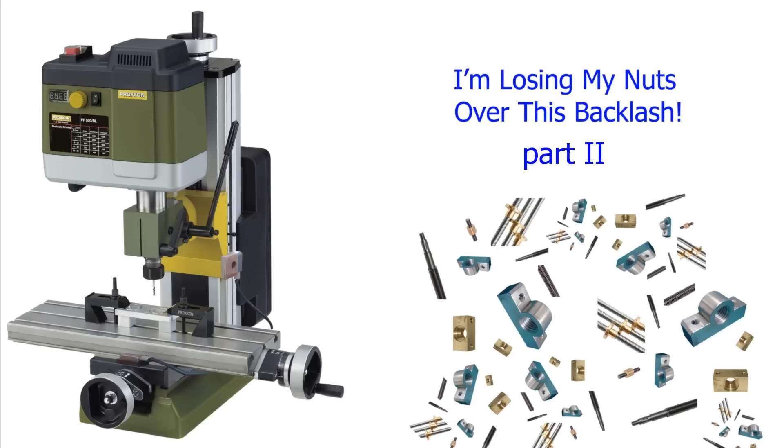In the previous video, I replaced the Z-axis of my Proxxon milling machine and reduced the backlash, the combined play in the lead screw, the nut and the bearing, from 320 to about 55 microns. With some careful adjustment of the nuts later on, I'll probably be able to shave off a few hundredths of a millimeter more. In this final video, I'll be tackling the Y and X axes.

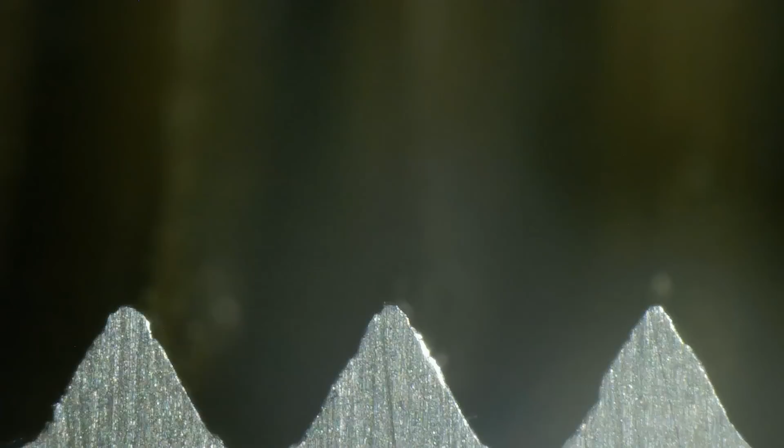To get a clearer picture of what I consider excessive wear, I want to determine whether it lies in the nut, the lead screw, or both. As we saw last time, play in the bearing also contributes a little. I'll be examining the sawn through nut and the shaft more closely under my microscope.

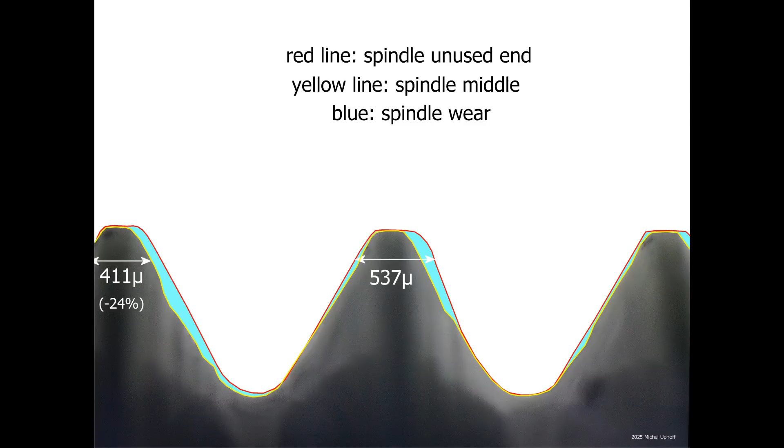It's clearly not just the nut, the screw itself is quite badly worn. That shouldn't really happen. In principle, the cheaper nut ought to take the wear rather than the lead screw. That is indeed the case here, but with 200 millimeters of screw engaging with a 16 millimeter nut, this degree of wear on the screw is really not normal in my view. I suspect the steel is of inferior quality. I'll return to that point briefly at the end of the video.

And so, the combined wear of the lead screw and the nut results in an irritating play of more than half a millimeter, enough to make even the most patient machinist groan.

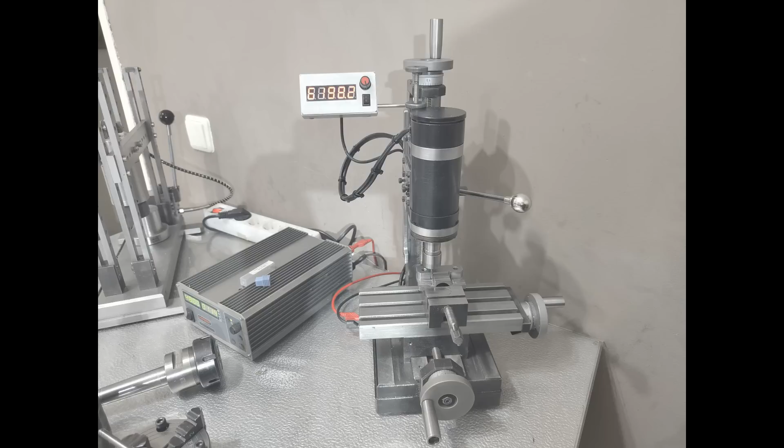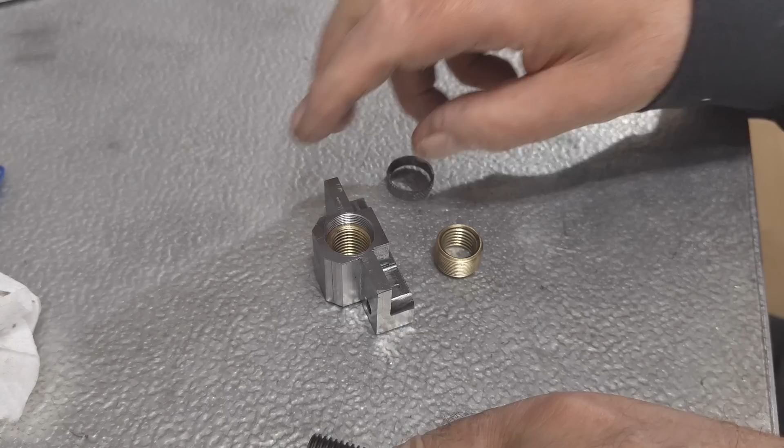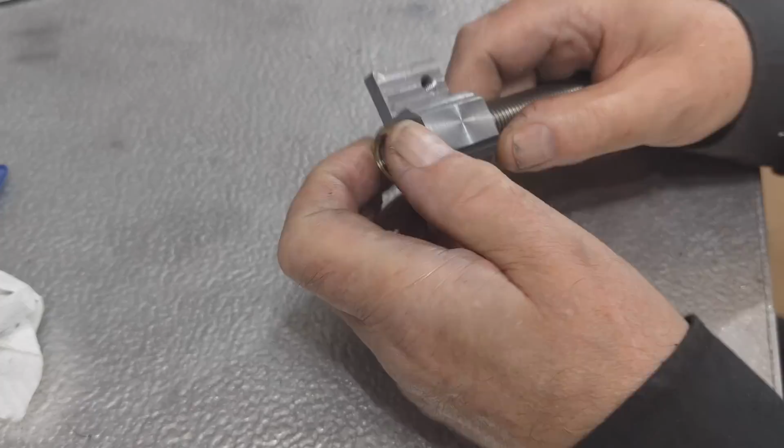The internal trapezoidal pitch of the nuts is 2 millimeters, while the external pitch is 1 millimeter. The long nut is secured with a dab of metal adhesive. By rotating the short nut, the play between nuts and lead screw can be eliminated. I lock the short nut in the desired position with a collar.

The Y-axis lead screw and nut are ready. I first fit the lead screw into the bearing block and set the preload by tightening the handle nut. Then I lock the whole assembly in place with a set screw. It is the same design I used when building my micromill, and it has served me very well so far.

Now, here's the amusing bit. In the original German version, a single rather wobbly bearing would have cost me more than all 6 thrust bearings and 3 ball bearings from China put together. Superior performance at a fraction of the price, which makes you wonder if the only thing truly precision engineered in Germany was the invoice.

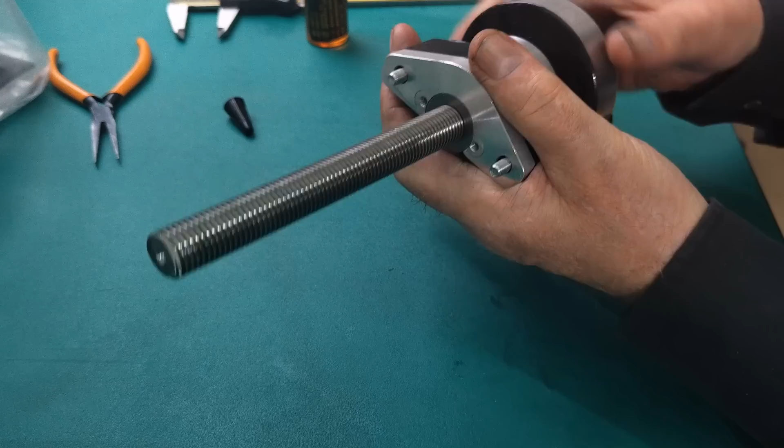Everything is running like clockwork. Time to remount the Y-axis and the saddle onto the base and see if all my hard work pays off with a delightfully low backlash.

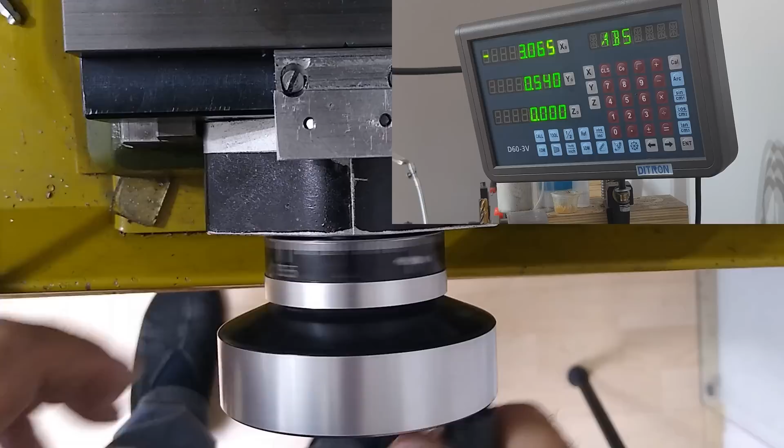Around 45 microns. That's about 2/1000 for the American viewers. With a bit of careful adjustment later, I'm confident I can shave off another 100th or so. I must admit, this result puts a big smile on my face.

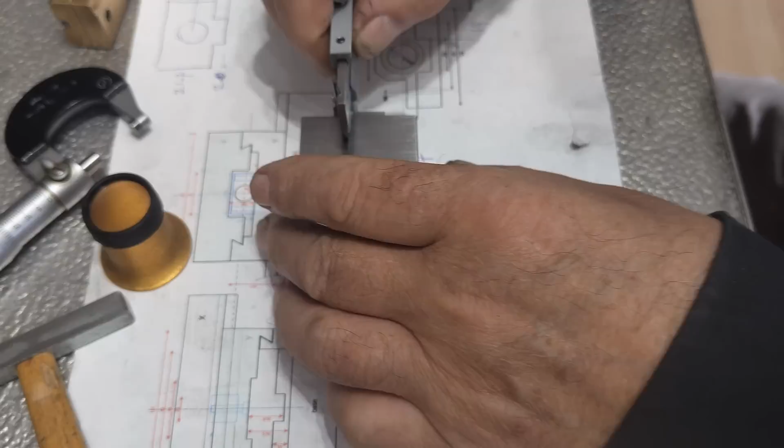Now onto the x-axis. On that axis, there is the least room for a nut, so I'll have to be a bit creative. First of all, some extra space has to be milled into the saddle. As I mentioned earlier, I lost some footage, including the milling of the saddle. Only 2 photos remain.

I had already prepared the housing for the x-axis nut in the previous video. But of course it still needs a thread, and the position of that thread is critical.

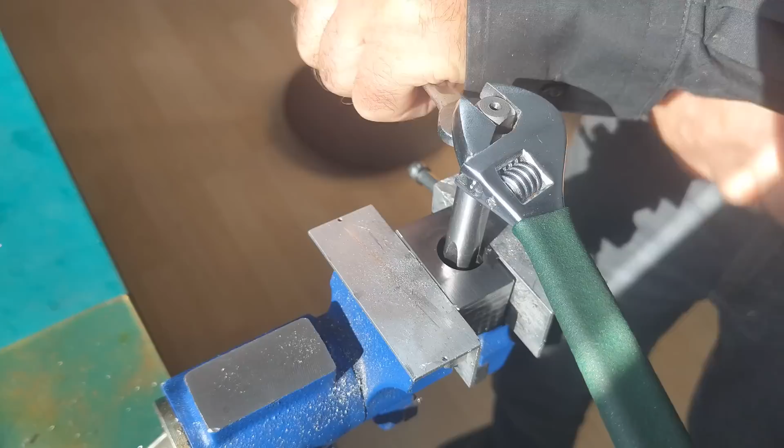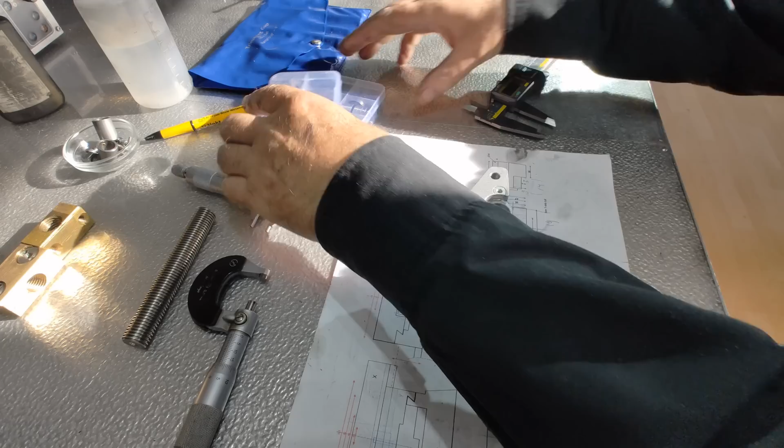The nut housing is ready. Now onto the bearing block. It has to accommodate 2 thrust bearings and a ball bearing. The system I'm using here is the same one I applied in my micromill.

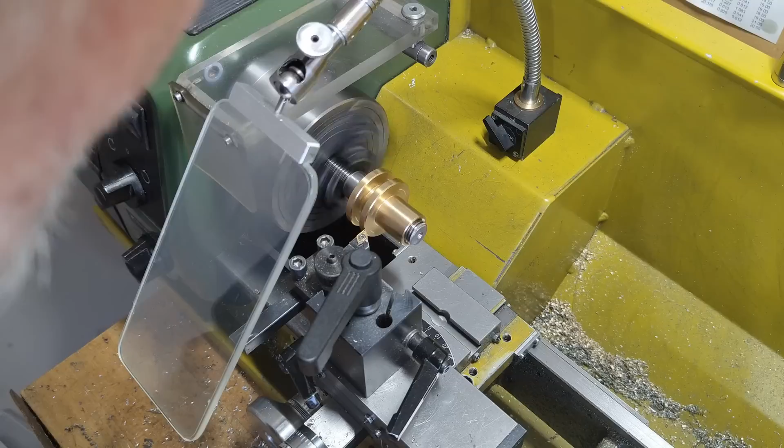The adjustable threaded bush for the X-axis has a slightly different design. The knurling is made directly on the nut itself rather than on a separate ring.

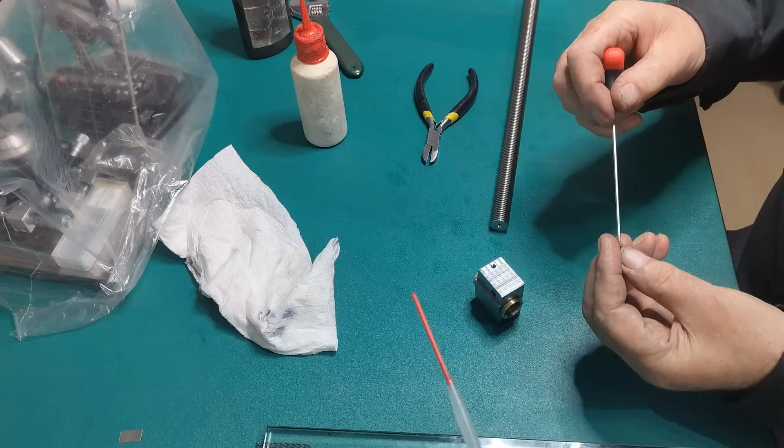The nut for the X-axis, unlike the other two, isn't accessible from the outside. That makes a hand-adjustable ring rather pointless, so instead, I'll secure the nut with a set screw and a small piece of plastic to protect the thread.

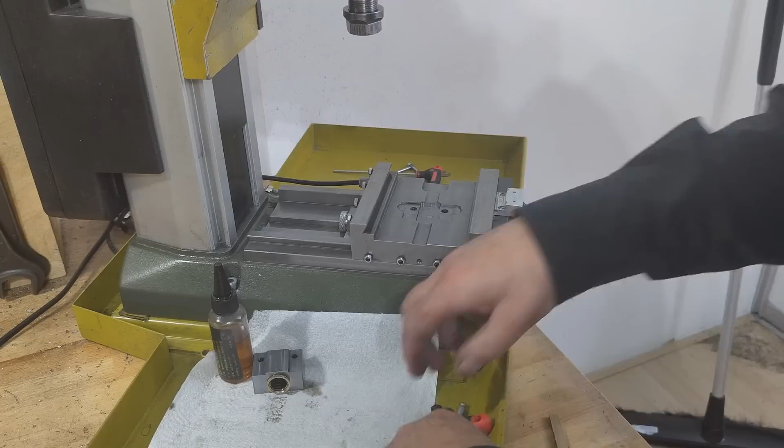And finally, I can get my milling machine ready for use again. I'm curious to see whether the X-axis will also reward me with such fine tolerances.

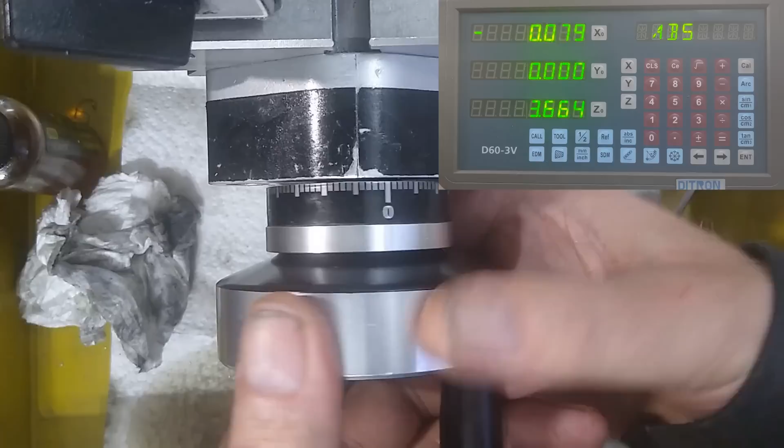Wow! Just 1/100th of a millimeter of play. That's practically perfect. I'm absolutely delighted with this. Yet something still nags at me.

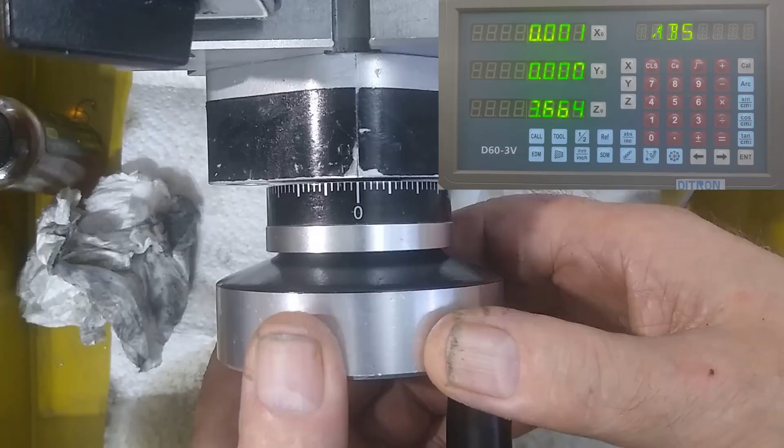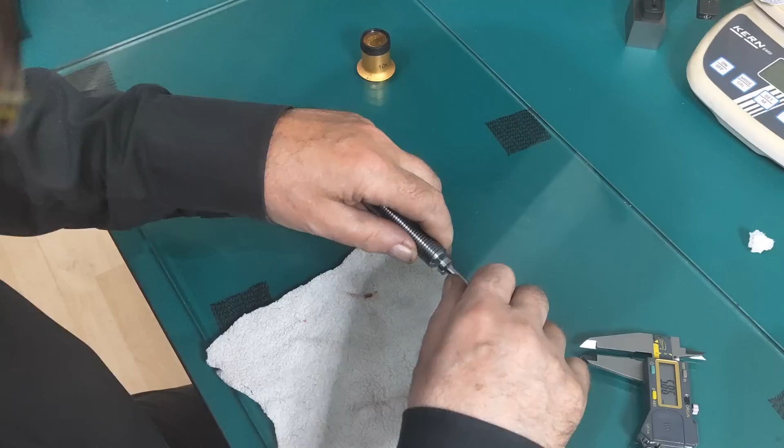What is it about the original Proxxon spindles that, in my view at least, shows premature excessive wear? Of course, I don't expect top-quality shafts in a machine like this. I'm not expecting hardened and tempered chromium molybdenum steel, but C45 steel, preferably hardened and tempered, is a reasonably affordable solution. Yet I fear even that isn't present in this machine. So, it's time to roll up my sleeves and do a little testing.

From the now redundant Y-axis lead screw, I made a small tensile test rod with a diameter of 5 mm. I'm curious about the tensile strength and elongation of the material. Fortunately, I made a tensile attachment for my benchtop hydraulic press, which comes in very handy here.

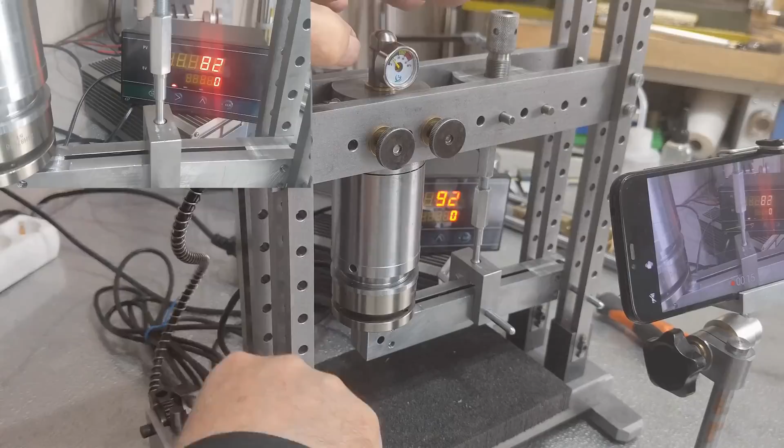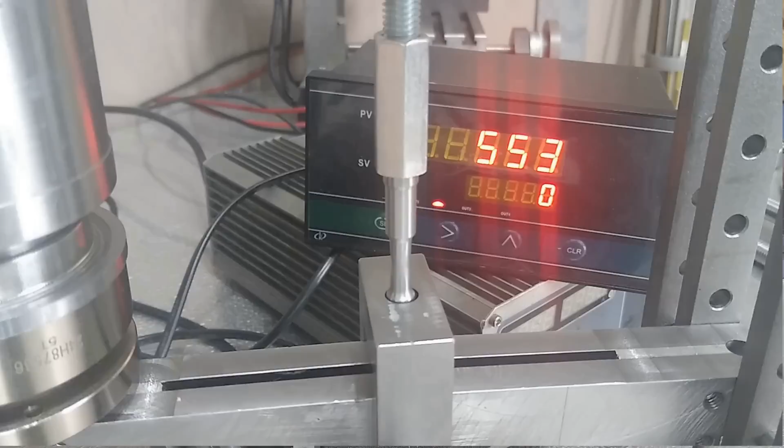660 megapascal, which could roughly correspond to C45 steel. But to be sure, I'll run a hardness test. Fortunately, a few years ago, I built a tiny yet precise universal hardness tester. Check out the video if you want to know more about it.

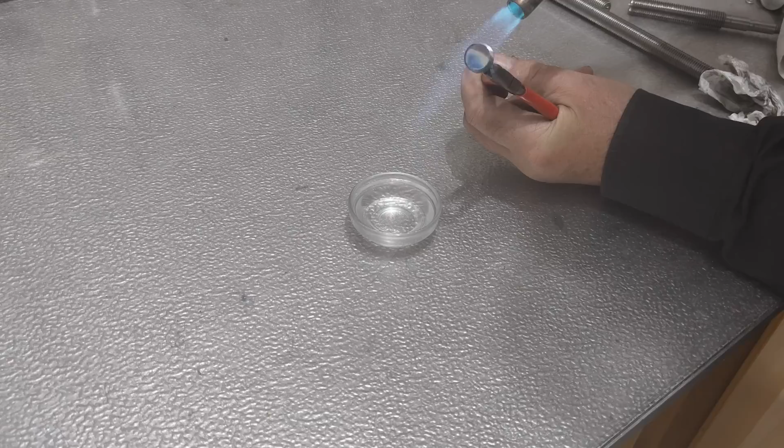One thing is certain, this steel is definitely not hardened. With a reading of 14.4, I end up in the unreliable lower regions of the Rockwell C scale. Let's see if this steel can be hardened. If it's C45, it should come out rock solid from a water quench, just as tough as it's supposed to be.

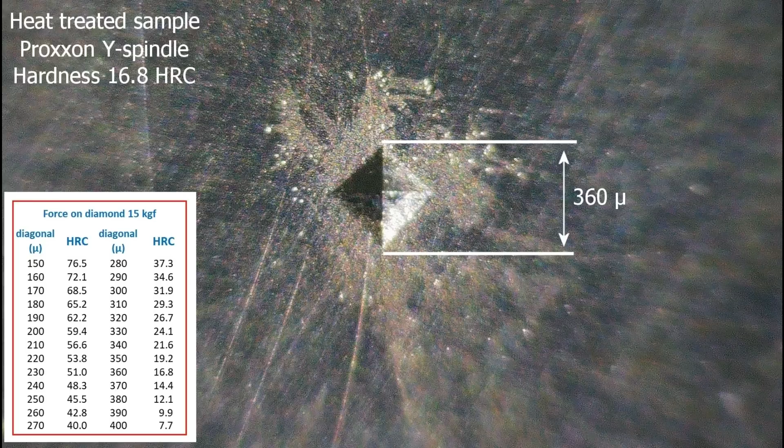Well, I actually expected this. Totally unhardenable. Judging by the tensile strength, we're probably looking at cold-drawn construction steel. Not exactly the ideal choice for Proxxon spindles, but I suppose they like to add a bit of challenge for their users. But what a joy it is to run little experiments like this with your own homemade machines and tools, and to actually get meaningful results out of them.

My FF500 has taken another big step forward, and I believe I've now managed to eliminate every genuine weak spot. Certainty on that will only come in 6 years' time, when these new spindles are the same age as the old ones. Still, I'm hopeful. I hope you enjoyed this double episode, and I'll see you in the next one.